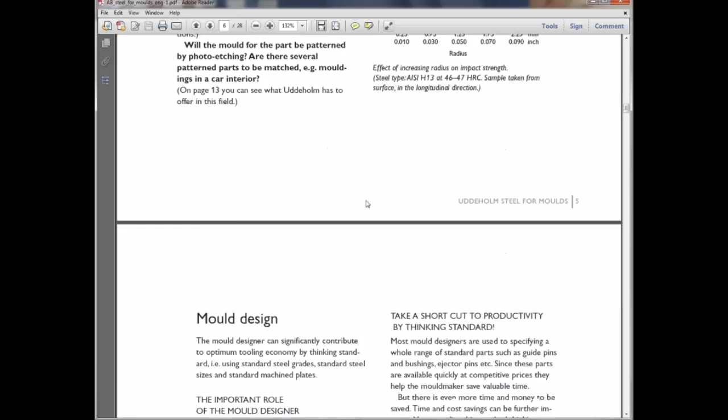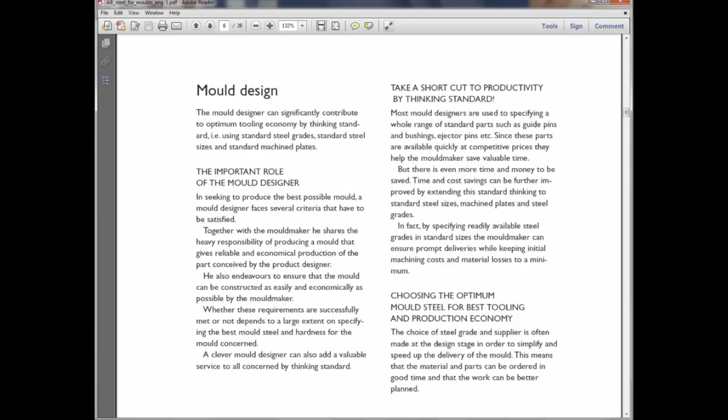When we go for the mold design, we also think about the material, what material we are going to choose for the mold design and for the product. So that is a very crucial thing, and there are many more processes involved when we are going to manufacture a mold. Designing is one part, but manufacturing is another part.

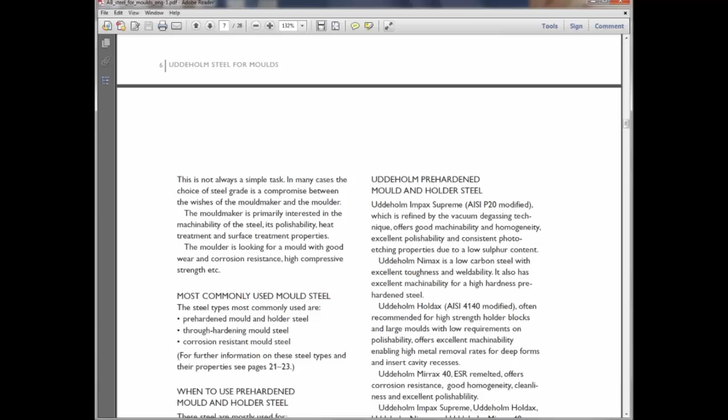Okay, so here are some things which I will share with you. Most commonly used mold steel. Are you able to read now? Yeah, I can see.

Pre-hardened mold and holder steel. So the steel types most commonly used are pre-hardened mold and holder steel, through hardening mold steel, and corrosion resistant mold steel. These are some categories which we balance when we choose the material for a mold. Sometimes we go for pre-hardened material, that is a little bit hardened, and after that we start machining.

And second is through hardening mold steel. Through hardening means we are hardening throughout the material. Are you aware of the through hardening process? I'm aware of it. It is like fully hardening, right? Through hardening means wherever you check, you will get the same hardness throughout the material, whether it is the top surface or the core. That is called through hardening.

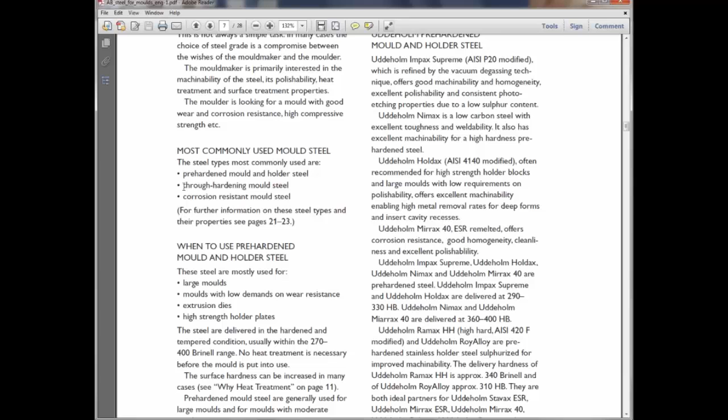And another thing is case hardening. Case hardening means just the outer surface is hardened, and that may vary as per the application. Sometimes people go for 1 mm, sometimes 0.5 mm, depending on their application. But in case of molds and dies, we go for through hardening, because the material wears out when we use it continuously. So the material should be through hardened.

And corrosion resistant mold steel. Some corrosion resistant element should be added into the material, so that during the process, over a long time and multiple applications, the material does not corrode. So the material should be corrosion resistant and through hardened.

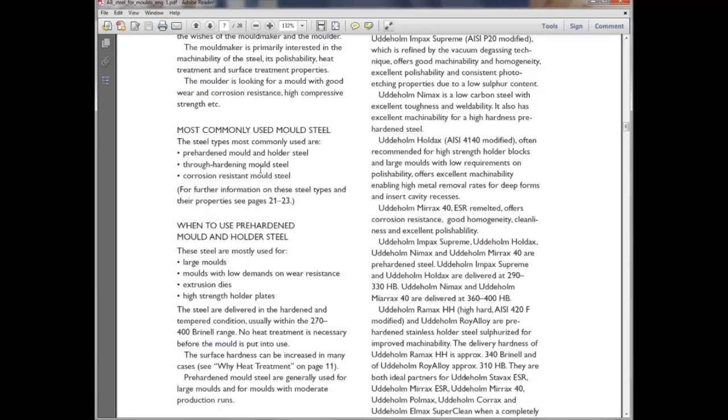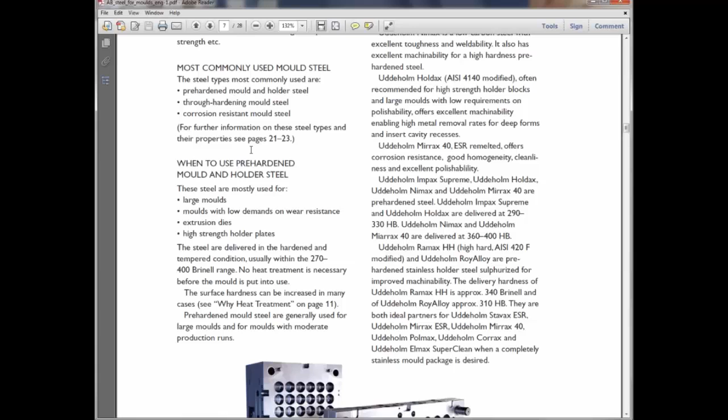Can you explain a little about this holder steel? Pre-hardened is like soft material, right? Pre-hardened means the material is already hardened, and then we go for machining. I will take this up 2 or 3 pages later, because there is a more elaborate slide there.

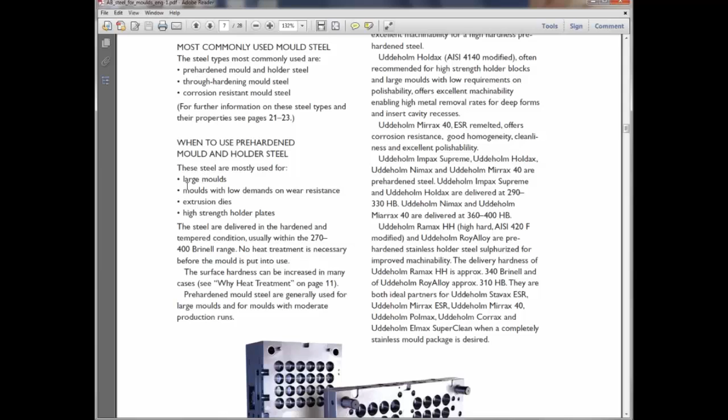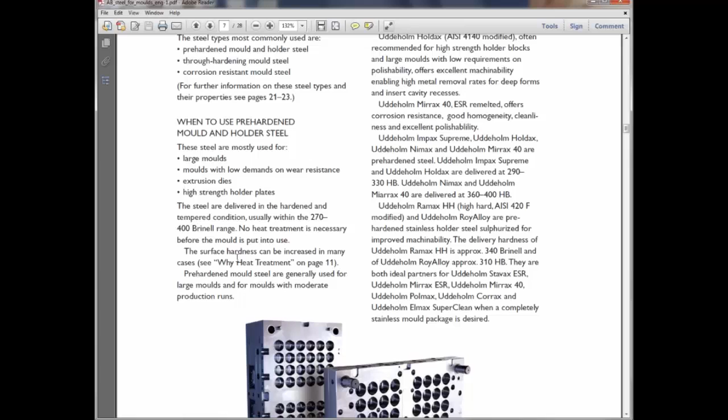With the mold plates, mold inserts, the whole mold actually. The core and cavity parts will be around 40 to 45 HRC hardened. The surface hardness can be increased in many cases.

Here they have some reasons when to use through hardened steel. For long production runs, like when you are going to manufacture some plastic bottles which have a long production line, at that time we go for through hardening, where bulk mass production is required. Mass production, yeah. We go for through hardened steel.

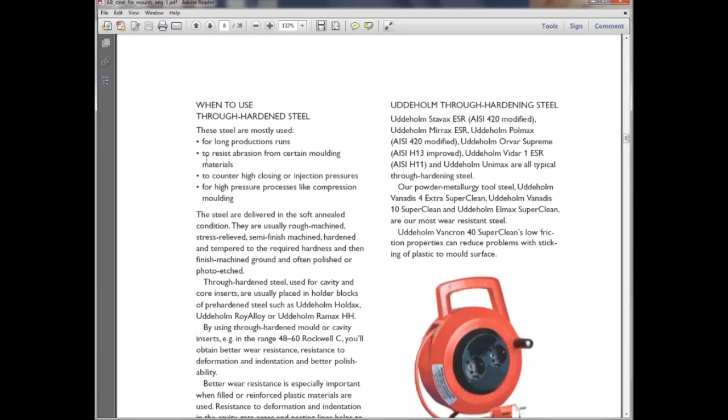To resist abrasion from certain molding materials and to counter high closing or injection pressures, because we apply a lot of pressure at the time of plastic injection, so the material of the die, the core and cavity, should be strong enough to sustain that pressure.

For high pressure processes like compression molding. In injection molding we don't apply that much pressure, but when we talk about pressure die casting, the pressure is very immense at that time, very, very high, and your mold material should be strong enough to hold that pressure continuously, because you are also pouring very hot material.

Around 800 to 900 degrees centigrade aluminum is pouring inside the mold, so the mold temperature is also increasing, but the increasing temperature should not affect the strength of the mold itself. Otherwise the mold can open, the mold can twist, anything can happen. Temperature variation is continuously happening on the mold.

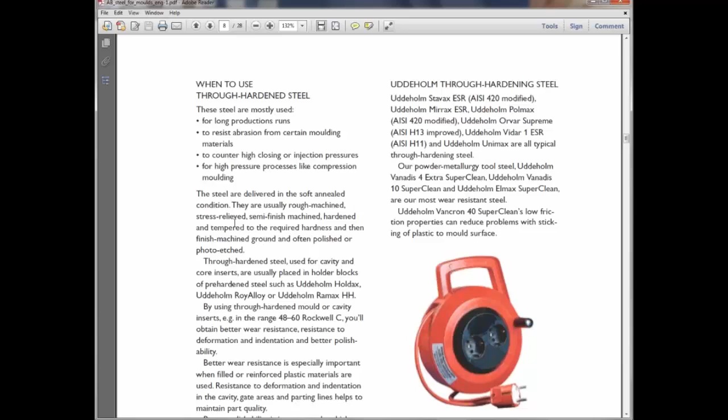Yes, continuously happening. Because of that we go for some alloying elements like chromium, like tungsten. We use these elements in our molding material because they are heat resistant materials, like tungsten and chromium, so that the mold doesn't lose its strength at a very high temperature.

The steels are delivered in the soft annealed condition. They are usually rough machined, stress relieved, semi-finish machined, hardened and tempered to the required hardness, and then finish machined, ground and often polished or photo etched. This is important, I will tell you.

So when we start machining, we take the raw material and first of all we go for rough machining. In rough machining the depth of cut is high, like 0.5 mm, 0.6 mm. We go for 0.6 mm so that the process completes in a short time. Rough machining.

At that time the load on the cutter is very high, because we are taking a very big depth of cut like 0.5, 0.6 mm. So many residual stresses generate inside the material of the mold during machining, because the cutter is rotating at around 1400 or 1500 rpm and we are taking very big depths of cut. Because of that, many residual stresses remain after rough machining.